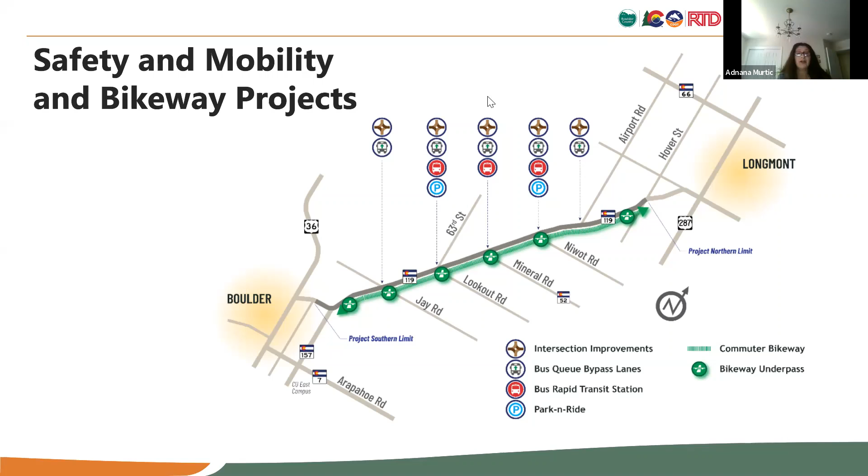I'm project manager for the Colorado 119 Safety and Mobility Improvements projects. We're here today on behalf of two projects: the Safety and Mobility Improvements Project and the Commuter Bikeway. Our projects focus on Colorado Highway 119, the diagonal highway between Boulder and Longmont, but they tie into greater RTD BRT connectivity beyond this corridor into Longmont and Boulder. We are planning numerous project elements, including intersection improvements, transit improvements, and this bikeway, which we'll explain in more depth.

Currently, Colorado 119 is the highest crash corridor in the county for motorists and second highest for bikes. During a 5-year period from 2015 to 2019, there were over 900 vehicle crashes, 17 bicycle crashes, and 2 pedestrian crashes, resulting in 4 fatalities. Our projects are designed to reduce those crashes and make the corridor safer. Over the 20 years following implementation, it's expected that over 370 vehicle crashes will be prevented, and the bikeway's construction is expected to eliminate nearly all bikeway crashes.

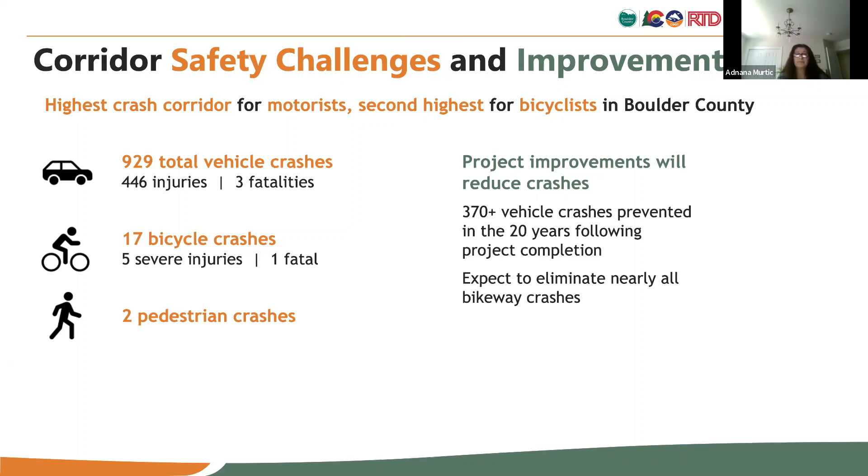The corridor lacks a safe, direct way to travel from Boulder to Longmont by bike, and current BOLT bus service can be slow and unreliable, which means many people choose not to ride the bus. The corridor currently has safety and mobility challenges, and as the region grows, these could get worse. These two projects are designed to address these challenges and improve mobility. The new commuter bikeway is a safe, direct way for people to commute. RTD will implement new bus rapid transit service on this corridor, expected to cut transit travel times in half and hopefully increase ridership. These projects are designed to mitigate those challenges and enhance travel choices. Now I'll go back to Alexandra to tell us more about the bikeway and its elements.

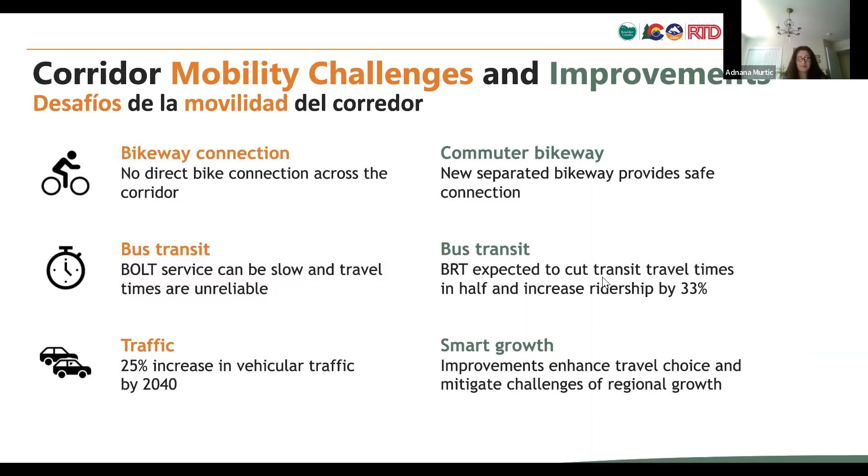The bikeway will be almost exclusively in the median between northbound and southbound 119. That helps the project because the median is all owned by CDOT, so we didn't have to acquire any right of way—we just had to partner with CDOT. It'll be fully separated from the road, plowed in the winter, so it'll be a year-round facility. There will be underpasses at the major intersections, and I'll talk more about that in a minute. There will also be direct connections to the bus rapid transit stations.

E-bikes will be allowed, and it's ADA accessible. Most of the path will be 12 feet wide, except in certain sections where it will get wider. The photo on the right is the US 36 bikeway, if you're familiar with that—it'll be a lot more like that type of bikeway than, say, Boulder Creek. We're designing this bikeway to be truly a commuter bikeway with as few curves as possible. The only curves will be to align it correctly where it needs to connect to something or to avoid wetlands.

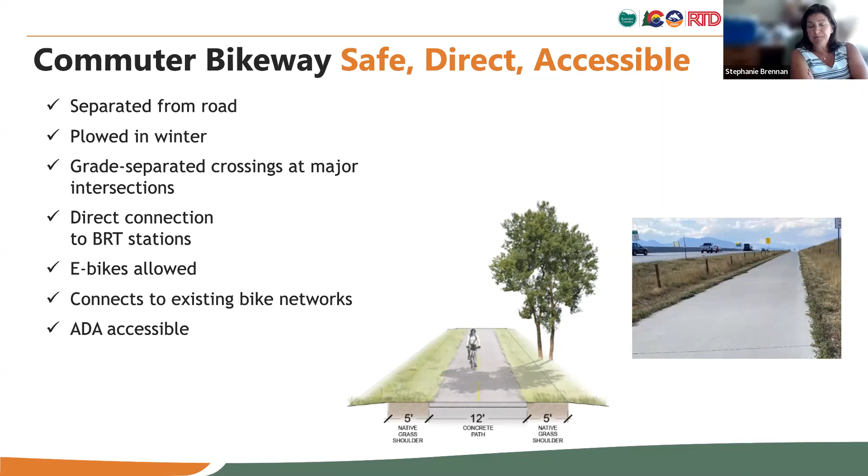Next slide. I have a question: in terms of e-bikes versus people using it as a regular bike, are you going to have a speed limit on it?

Thank you for asking that—that's something we're spending a lot of time on. We're probably not going to go with a speed limit. What we're probably going to do is stripe down the middle for certain sections, and as it comes into areas where more people will be, especially through the station areas, we'll try to encourage faster cyclists, whether on e-bikes or regular bikes, to slow down, since that's where there'll be lots more people. On longer sections of the bikeway with the 12 feet width, there should be plenty of room to pass, but we're working to figure out how to negotiate areas with more people, since most people, including myself as a slower cyclist, don't want to be passed closely in tight areas, while faster cyclists want to get to work quickly. There's an issue between cyclists using it for exercise versus commuters less familiar with navigating e-bikes, and when they get into these situations, there's a concern about everyone's safety if there's no kind of natural governor in place at these intersections.

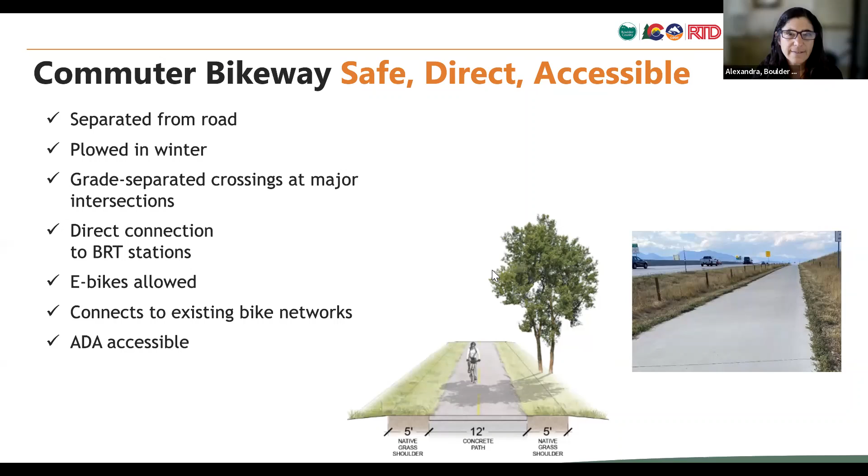Next slide - I think the next slide will actually... this one, no, it's a few more. It'll show how the different widths of the bikeway work, and I'll go back to that in just a minute.

This shows all the different connections you can make from the bikeway into Gunbarrel, into the city of Boulder, onto Airport Road, and into Longmont. There are a lot of different bike networks you can connect into - you can almost think of this bikeway as closing a big gap between the different bike networks in Boulder and Longmont. The light aqua blue squares show where the proposed bus rapid transit stations are going to be, so it'll give us lots of connections.

So are these planned connection points, or are they places you could potentially connect? Well, for example, on Jay Road there's already buffered bike lanes, and you'll be able to enter or exit the bikeway. I'll show that slide in a moment for Jay Road, and the same thing with the other connections like Airport Road.

Well, so for instance, there is no connection - I'm looking near 63rd, not where 63rd crosses, but between 63rd and Niwot. Right now the diagonal goes over that bikeway, but there's no way to get in.

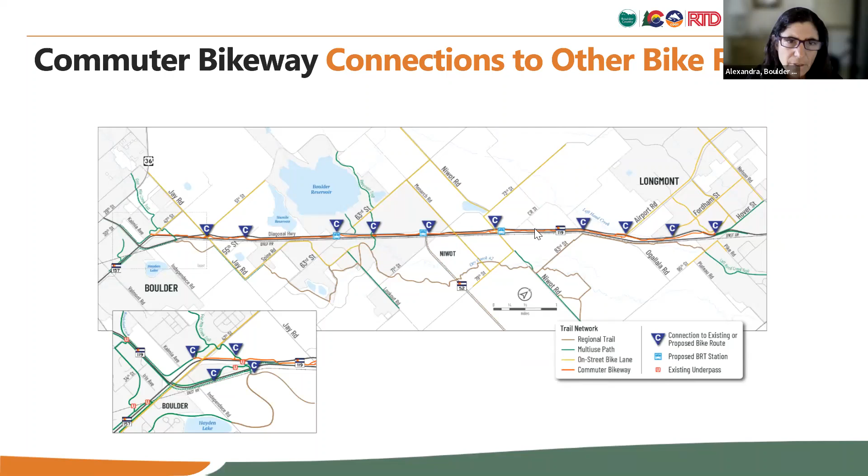And at those spur connections or intersections, there's also going to be an intersection with 4 Mile Creek Canyon Trail. When there are intersections, the path will go from a 12-foot path to a 16-foot path, to give people more room to navigate through the intersections. I'm hoping that will partly address the issue of all the different speeds.

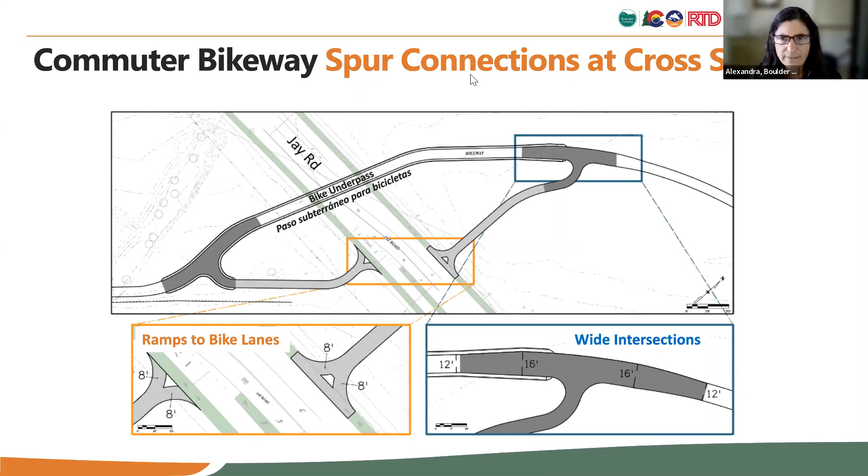Will the underpasses be lit? Will there be lighting? Yes, in the underpasses. And during the day, because sometimes when you get into those underpasses on a very sunny day, it can be dark, like a black closet. Yes, there will be lighting at the underpasses, correct.

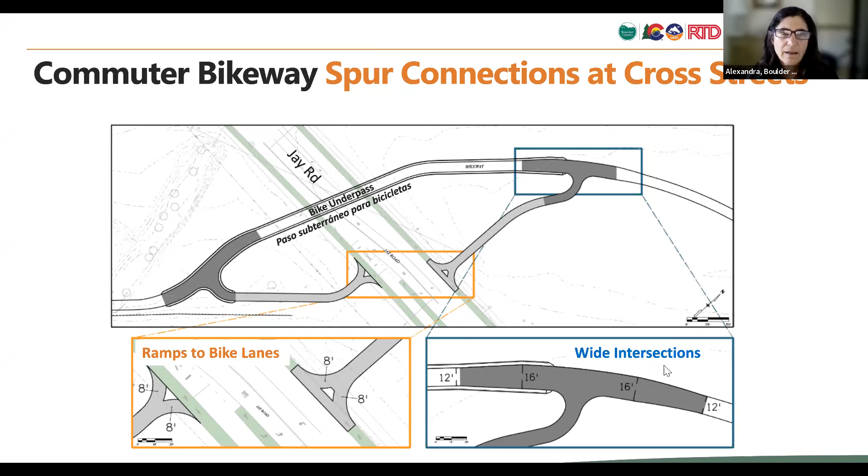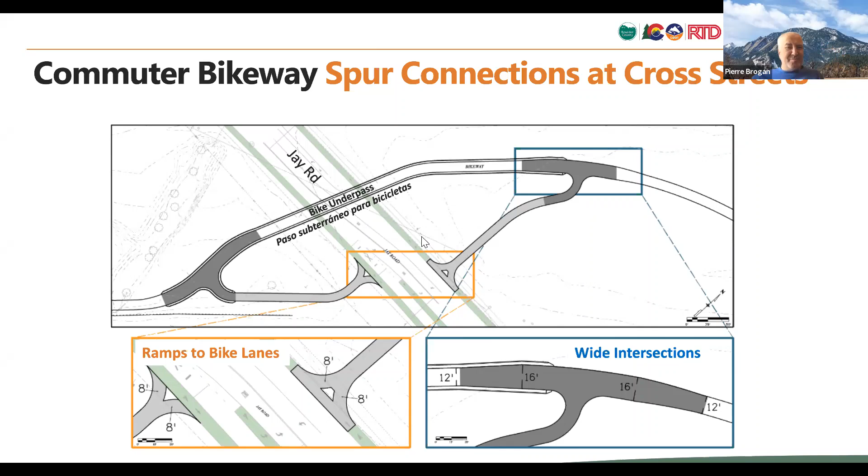I moved to Boulder exactly two weeks ago, and so I'm trying to figure out my commuting situation. I met Emily and Elaine from BTC at the Bike to Work event that I was volunteering at, and they inspired me, so I thought I should find out what my commute might be like. So here I am, sorry.

Yes, so good underpass lighting.

That kind of introduces my next slide, which is all the different things that the commuter bikeway has to go over or under to build. Some people ask, why is it taking so long? Why is it taking so many years to design this bikeway? This is part of it.

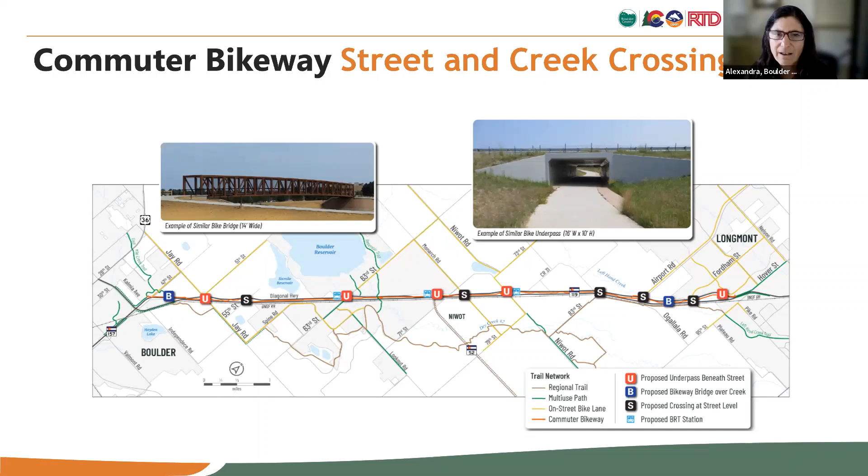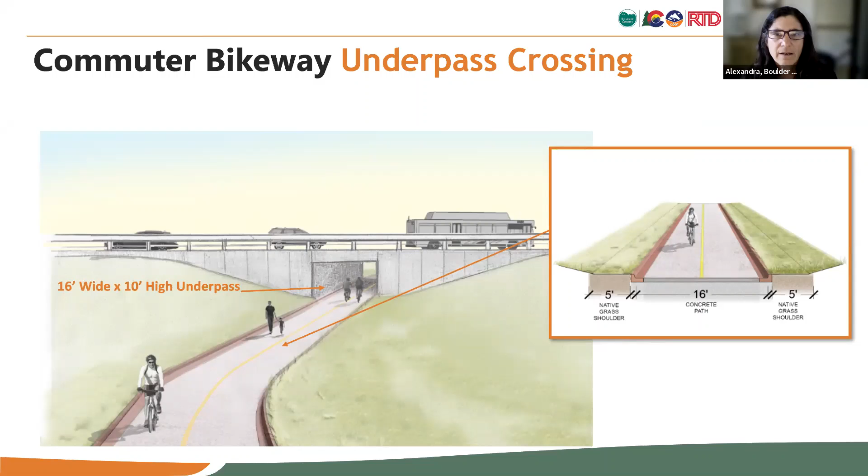And at the underpasses, again, the path will become 16 feet, going from 12 feet to 16 feet to accommodate people going through the underpasses. Next slide.

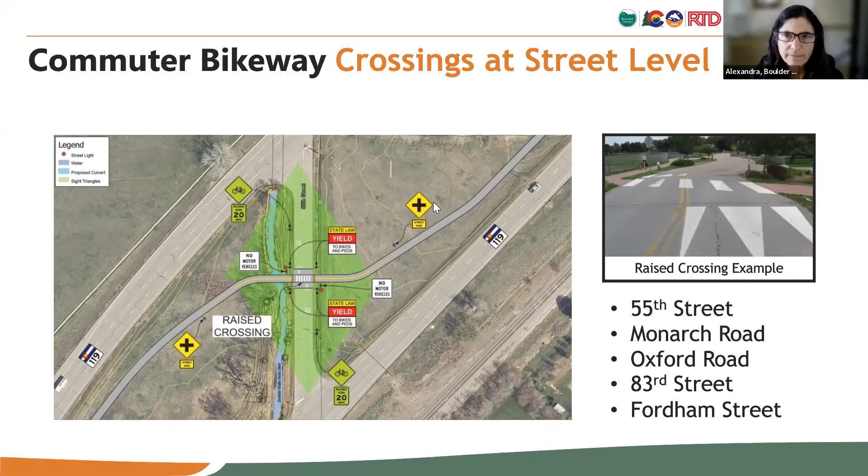BRT, as opposed to traditional bus service, is a high frequency, high quality bus service. It's much more reliable and faster than those traditional bus services. A good example of that would be the Flatiron Flyer, which has been in service since January of 2016. I was involved in that project too. That connects downtown Denver to Boulder, so this is going to be somewhat similar to that.

Of course, we have signalized intersections - it's not a freeway setting, but the idea remains the same. The safety and mobility project, which is this project, we're going to be designing a bunch of improvements as far as BRT is concerned, including new stations, queue bus bypass lanes that I'm going to get into in one of the slides coming up later, and then park and rides to support the future BRT service.

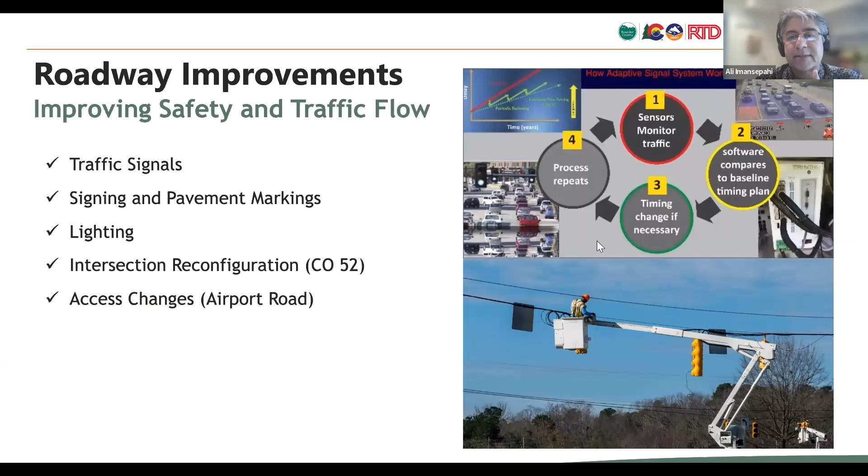Intelligent Transportation Systems, or ITS for short, is basically about integration of technology into the roadway project. A lot of what we're doing here is to put the hardware in place for CDOT's ITS office to disseminate real-time traffic and traveler information to the public and to the media.

This includes closed circuit TV cameras that you've seen all along the roadways for providing that sort of real-time information, so the traveler makes better informed decisions while they're on CDOT's cotrip.org website, and they can see all of this information.

And then the road and weather information stations, again a piece of hardware that is supporting this cause, along with automatic traffic recorders that provide live traffic volume and speed to CDOT.

ITS office. One other thing we're implementing in this corridor is adaptive signals, which I touched on earlier. This is a state-of-the-art system that continuously monitors traffic conditions, and as opposed to traditional signal systems that have AM, PM, and off-peak timing plans, this one continuously adjusts those timing patterns based on real-time live traffic conditions. It also reacts to traffic accidents, special events, and roadway construction.

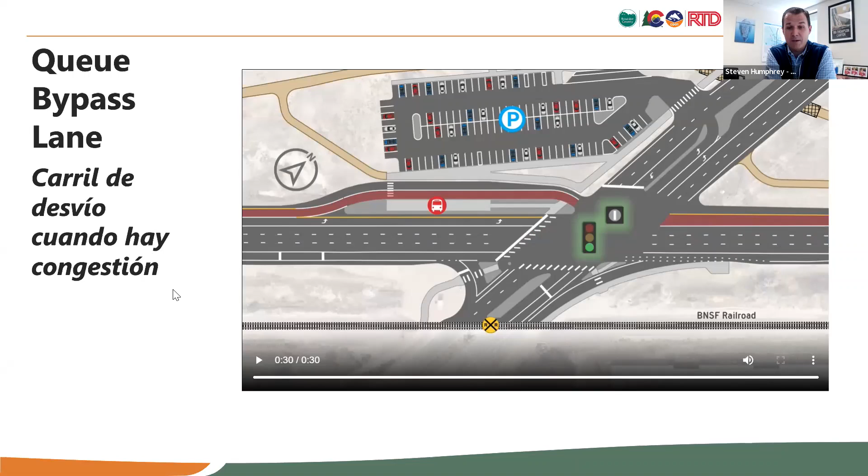Ali kind of walked you through all the different improvements taking place in the corridor, and now hopefully I can talk you through some of the specifics at a few different intersections in the corridor. I don't know if we have time to go through all of them today, but we tried to highlight 3 of the key intersections, and we're going to start here with the 63rd Street intersection.

We're going to have to be constructing a left turn lane there to allow access in and out of the new parking lot at 63rd.

As we keep going through the list of improvements here at 63rd, you'll see in the pinkish-red color those bypass lanes that Ali mentioned and showed in the video. We'll also have improvements like upgrading the signage at all these intersections, roadway striping, and lighting in this area, which will be great from a safety perspective and otherwise, plus upgrades to the traffic signals.

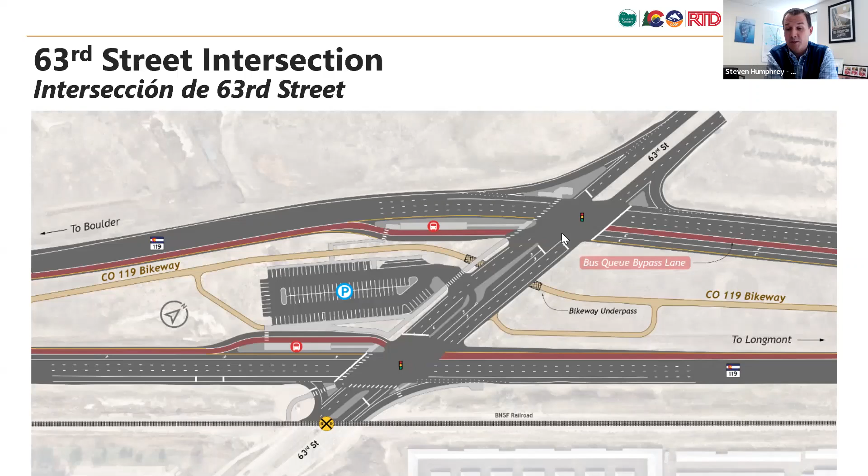I think you're spot on about your concern, though, and we did look at some options when trying to figure out the best location for this parking lot and the turn lanes between the two intersections at 119, that considered using a turnaround up there, but we were afraid that would make things even worse, so we tried to stay away from considering anything like that. Your concern is certainly valid, and something we could discuss with the city of Boulder about whether they might have resources to bring to the table to help support making changes there.

No, thank you, I appreciate that. I usually turn onto 63rd to avoid the traffic pileup on 119 and take the back roads, because I live in Southwest Longmont, so I try to kind of snake behind 119. I'm very curious to see how these solutions could alleviate some of that backup.

All of our employees at WICHE get an EcoPass, and I'm in a PhD program at Boulder, so I also have an EcoPass as a student. It's been challenging because I would like to use the bus, and it does that first and last mile, as we all talk about—it doesn't quite connect the dots for me. So I'm very interested to see if this will help that. Thank you so much for sharing your information today.

Yeah, you bet. And the glass-half-full in me would say that hopefully when we're done with all these improvements, your drive will be a little bit better. But I digress—Chrissy has her hand up, so maybe she's got something to add.

I have a clarification question. This call is fabulous to hear people's lived experience, I'm really enjoying it. Some of the next steps seem to be to talk to City of Boulder. Stephen, is the plan that people find City of Boulder themselves, do they send emails to your team that get pushed to City of Boulder, or is there a specific email they get? What is that chain, do we know?

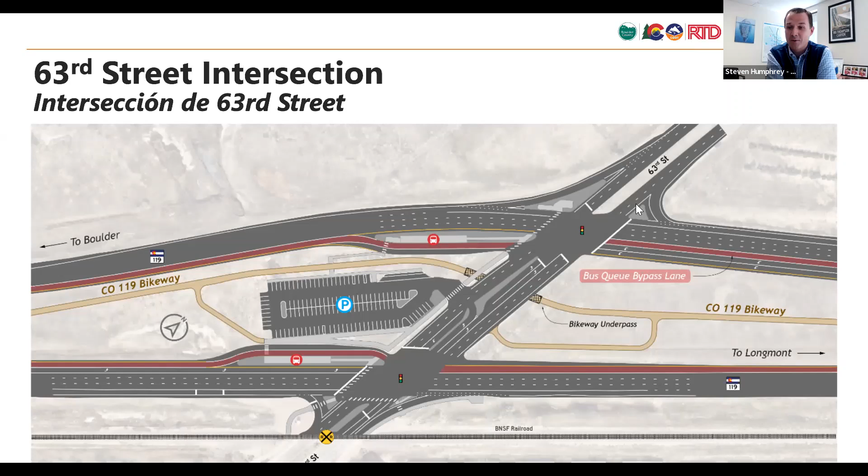We also have a question from Doug, unless there are more comments around that. I don't want to push Doug's comment off, but our next slide is about Colorado 52, so perhaps we go to the next slide and walk through that, and maybe we'll even be able to answer his question.

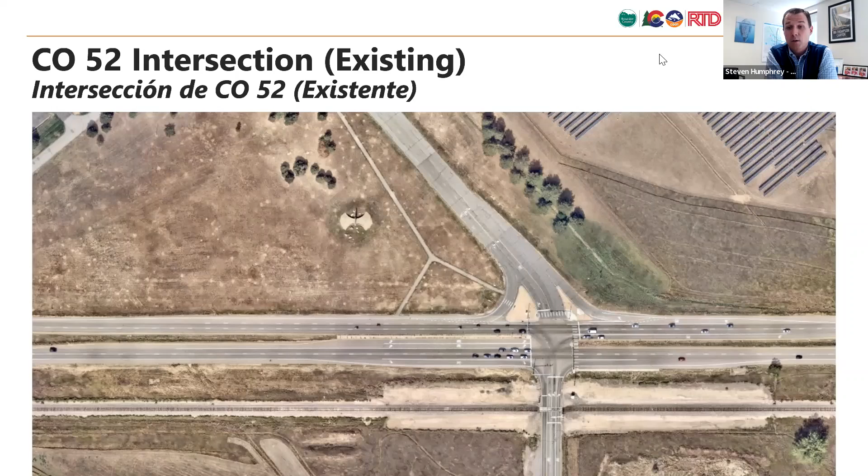I'll keep moving along. What you see on the screen is the existing intersection configuration at Colorado 52 and 119. Today it's one big intersection where northbound 119 and southbound 119 are together. I want to show this image for perspective. If we flip to the next slide, you'll see our proposed improvements. I hope you can still see in the background the outline of the existing intersection and the change we're going to have here, with the separation between northbound and southbound.

This is one of the more significant sets of improvements in the corridor, and some of the conversation may already answer why we're looking at a change here at 52. One of the bigger challenges in the corridor is the long queuing we've talked about, where cars are queued back 1,000, 2,000, 3,000 feet from the intersection. That creates safety concerns when people traveling 55 to 65 miles an hour aren't expecting to stop a half mile or quarter mile before an intersection, which can lead to rear end crashes, a lot of what we see in the roughly 900 crashes Adnana pointed out.

A detailed and extensive traffic analysis study was completed for the corridor, with a lot of thought and options put into what's best to improve operations, reduce that queuing, and improve the 52 intersection. This is the preferred recommendation that came out of that. As you can see, we're realigning and separating the two intersections, and a secondary benefit of these roadway and intersection improvements is that we're able to continue with a similar bikeway configuration in the median.

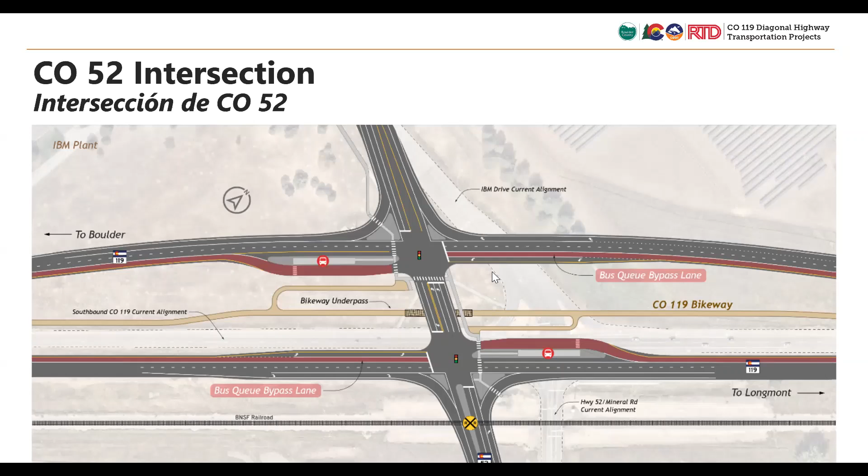Yeah, I mean, if there's synergies with the business park here, at least I could speak, if the costs are reasonable and you can secure the project funding, paving a few hundred feet may not be very difficult. Maybe the business park tenants would help offset some of the costs. I think they would at least be willing to have that conversation. That's what I would think. That's super helpful, and that's great.

I do want to point out, and give you a little more background. You can see that railroad crossing of the BNSF, which is always a fun thing to do anything with the railroad. But we're working on coordinating with them to make the adjustment you can see here of the intersection. During that coordination, we're also making sure we can accommodate that crossing, because on its own, that could be a 2 or 3 year timeline just to get a bike path constructed next to a railroad, working through the Public Utilities Commission and the railroad.

So we're going to make sure that happens as part of this project. But that kind of brings up the point I'm trying to make: sometimes the path part of it is the easy part, and it's the coordinating with the railroad, or coordinating whose land it is that we're putting the path on, and so on and so forth.

I think it's phenomenal that you guys might be interested in partnering, but it may be a question of the partnering plus who owns the land, and how do we make those connections where we're able to construct within someone's easement or right of way or what have you. So great to know, and more to talk about. And Alexandra, I know Boulder County is working on all those connections, so I'm assuming that's something you guys could follow up with them regarding.

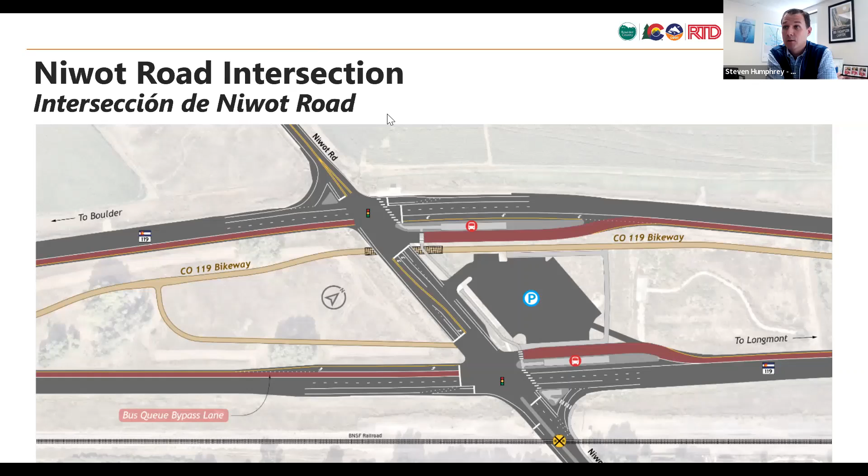All right, I think now it's my turn to turn it back over to Adnana for some final thoughts. Thank you, Stephen. Next slide, please.

Adnana, before you go on, we have another question from Melanie about the bike path in the median. Will there be a protective barrier along 119 in case cars go off the road?

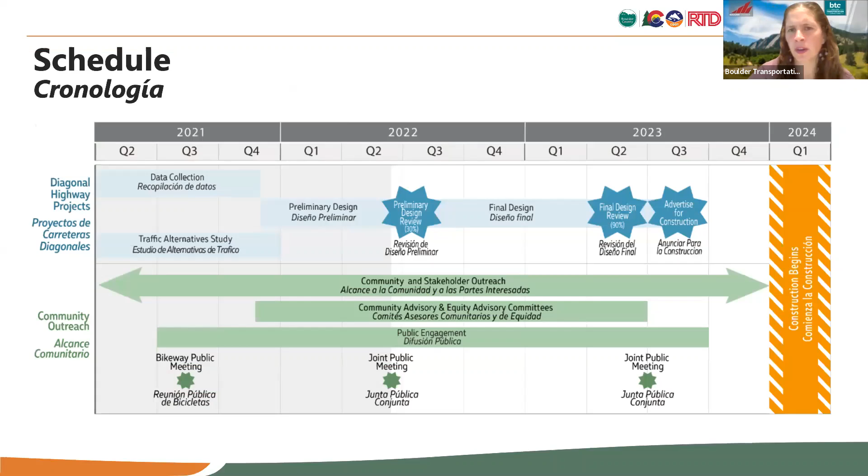Stephen, did you want to take that, that's kind of a road question, or do you want to? Yeah, I mean, I think the...

Short answer is there's going to be protections where the bikeway may be close enough to the roadway where it's warranted. In areas where, and now I'm going to get probably too technical, but in areas where the bikeway is outside of the clear zone, which is that distance from the roadway where cars would be coming off the roadway and hopefully safely coming to a stop, as long as the bikeway is outside of those clear zones, we wouldn't have any protections. If the bikeway is coming up to or close to the roadway, we would be looking at putting in some sort of guardrail or barrier to protect the bikeway.

I'll just say from the roadway side, we don't want to do that. We want to do that as little as possible, because putting another thing like guardrail out there is another hazard for drivers of the corridor. So we want to be context sensitive and only use that in scenarios where we need to, or if we can't come up with a different design. But if it's warranted, we'll do it. It's one of those things where we put in the guardrail to protect the bikeway, and then we create an obstruction that cars are hitting. So we just have to balance both sides of the equation.

And Alexandra, I'm sure you maybe have more from the bikeway side. Not really, but I did have a clarifying question.

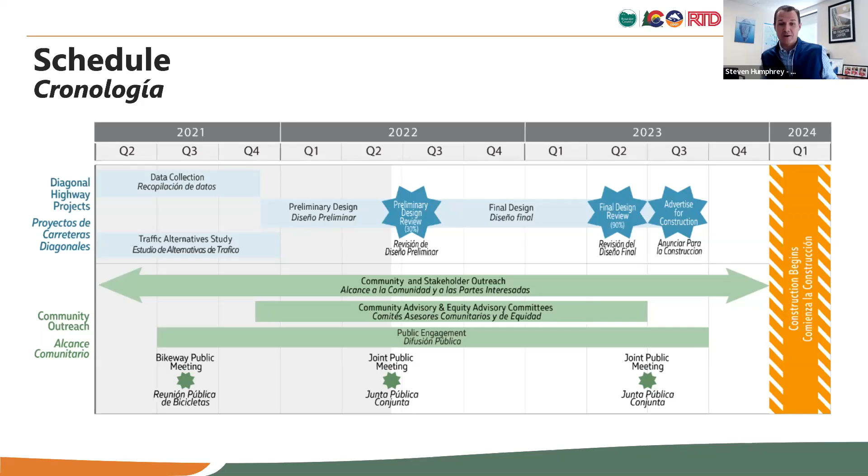All right, now I'm going to get back out of the way. Sorry, Nana. No, you're fine—that was a really good question.

Going back to the schedule for these two projects: both are based on what we already shared with you. This is the preliminary design phase, and we expect to complete final design in summer of 2023. Throughout our design, we have a community advisory committee and an equity advisory committee, and both have guided our projects and provided crucial first-hand knowledge about this corridor.

Construction of immediate project elements is targeted to begin in early 2024. As we work through final design, we'll have more information about scheduling and construction impacts, which we'll share at our final community meeting, anticipated in summer of 2023. Throughout these projects, we've been meeting regularly with our corridor partners, including the City of Boulder, City of Longmont, and Commuting Solutions, and we look forward to continuing that coordination.

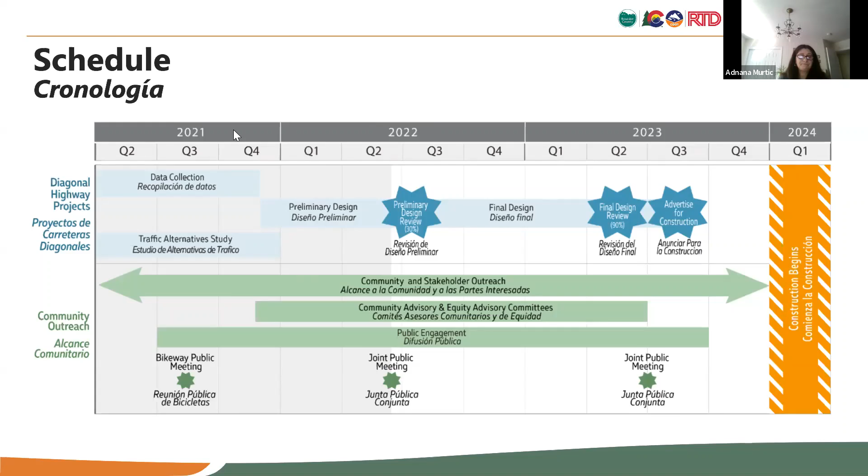Our projects have an estimated cost of $122 million. Through agency contributions and grants, we've secured $91 million so far, and we're actively seeking the additional $31 million still needed to finish both projects.

When we go to bid for construction next year, we'll build the project elements we have funding for, including roadway safety and operational improvements, queue bypass lanes, park-n-rides, a BRT station, and an underpass for the bikeway. As additional funding is secured, we'll build the remaining project elements to complete both projects.

All meeting materials, including from our first community meeting on June 27th, have been placed on this website. We're inviting you to sign up for the project mailing list to receive updates, and there's a website where you can submit comments by July 18th.

An FAQ document is being prepared as we speak, and as we receive questions, we'll make sure all answers are appropriately addressed—that document will be published in early August. The final design community meeting is again scheduled, anticipated in summer of 2023.

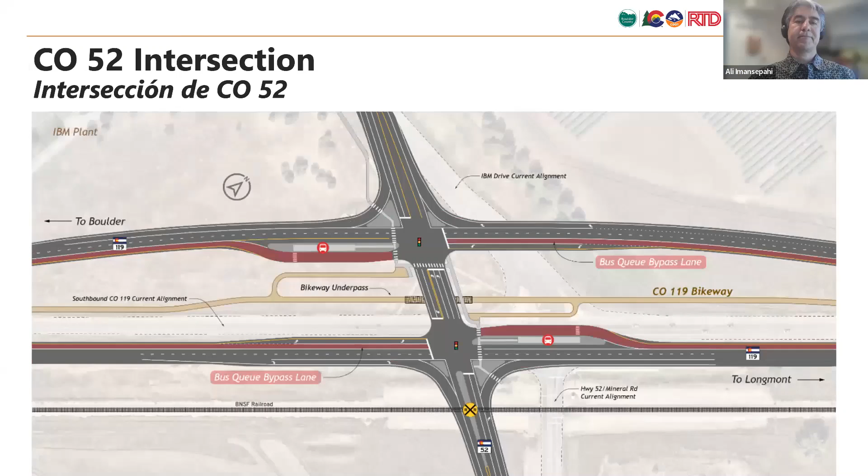I'd like to chime in on one thing I probably missed in my piece of the presentation. If you can go back to slide 11 for just one second. Just tell me when to stop, Ollie. Go ahead, keep going. Just wanted to make sure to point this out. Okay, right here is good. So you see the diagonal, which is the scope of this project, basically from Hover to the north and Foothills Parkway to the south.

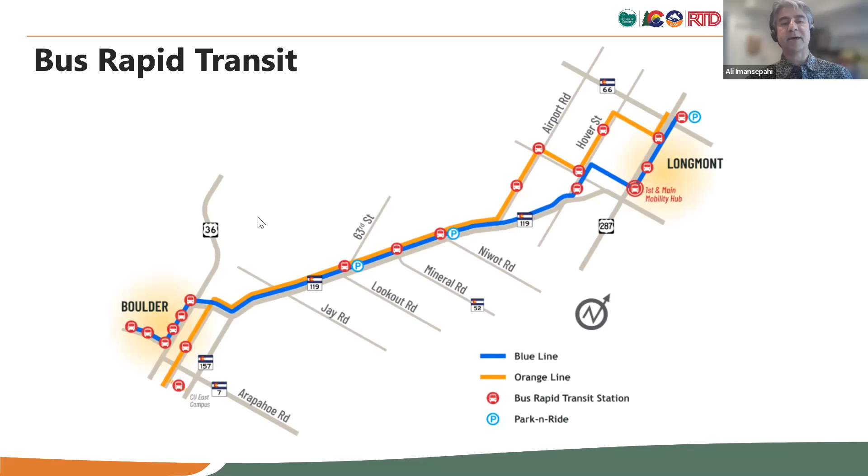What RTD is going to start working on the design of at the same time is, you see those red bus logos within the cities of Boulder and Longmont. Those are the designated BRT stops that we talked about, that were decided and documented in the PEL. They'll be going in along with the park and ride on North Longmont, and then the CU East Campus improvements will be a parallel effort to be implemented, so we have a full-blown BRT. I just wanted to point that out. It's like having two projects: one, the diagonal for the safety and mobility improvements project we've been talking about through this presentation, and then everything else we need to do within the cities. That's RTD only. So I just wanted to point that out.